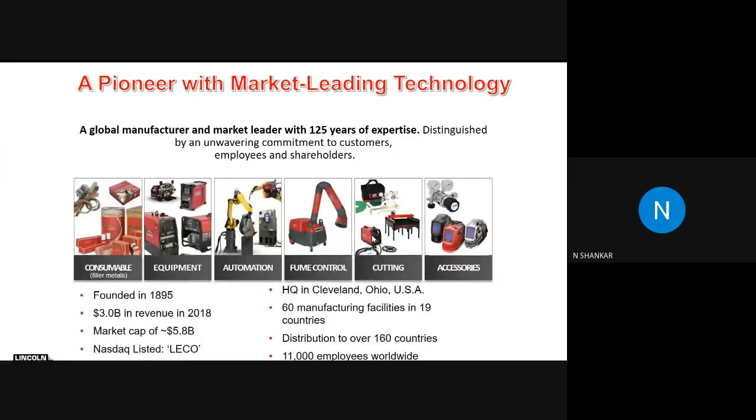We have 60 manufacturing facilities across 19 countries and distribution to over 160 countries and 11,000 employees worldwide. Lincoln India, where I come from, started off in 1997 as a regional office with no commercial transactions. Subsequently, in 2019, we built our own manufacturing facility. It's in the Mahindra World City premises, and we are presently the largest single wire manufacturing facility, meaning one particular factory's output - we are the largest MIG wire manufacturers across India.

And we are the market leaders in MIG wire. We also import and sell equipments from our different facilities all across the globe, and we have a fully equipped training center, and we do around 250 to 270 crores every year's turnover. If you look at Lincoln globally, we are one of only 3 companies in the world that can cater to all categories, like consumable equipment, gas products, automation - LECO, Colfax, and ITW.

And in local language, LECO is Lincoln Electric, Colfax is ESAB, and ITW is Miller. So we are the only 3 companies across the globe who offer a total welding solution and can provide you anything. And by a large margin, we are the market leaders.

We have a diversified business. Our business is not focused on a particular segment or particular solution. We lie across general fabrication, process, power, energy, heavy industries, construction equipment manufacturing, automotive, and transportation. So we have a solution for all ranges, and our business is diversified with about 42% of our revenue coming from equipment and 58% coming from consumables. Normally, if you see any welding company, they'll have a 30-70 combination, 70% coming from consumables and 30% from equipment, if it's a complete solution provider.

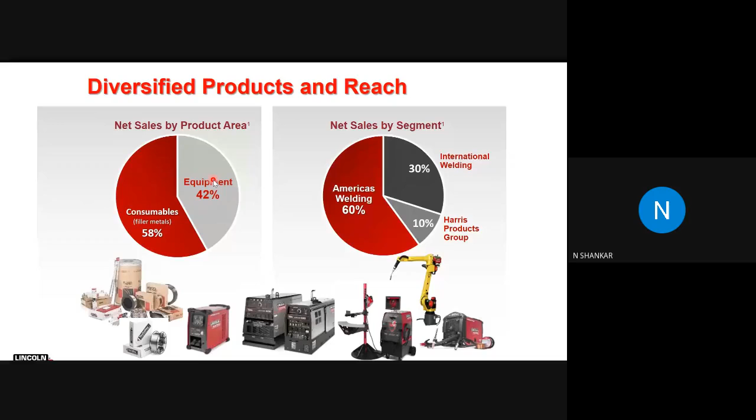We are the global leaders, and we are recognized as the welding experts, able to give you value and solution-driven products, and innovative products. There also we lead ahead. For example, we have kept changing with the industrial revolution.

When industrial revolution 2 came in, we were moving from transformer-based equipment and wire and stick-based filler materials, to where we moved on to inverter-based equipments and proprietary waveform technologies. When I say proprietary waveform technologies, I mean waveform controlled processes, or playing around with the current and voltage over time to give a weld. What is this waveform? It's nothing but playing around with the current and voltage.

When you're in a CV process, when you set the current and voltage, you allow the voltage to be constant, and the current dynamically keeps changing. But the current and voltage need not be at that level always, because heat is not required for welding all the time. So we play around with the current and voltage over time, and that's called waveform control technology.

We have developed a lot of solutions. We started off way back in the 90s with STT, which is a very famous process. Subsequently, we developed 100 plus. Each of these processes are developed for certain applications, so you have an end result, and based on that, you start working on a waveform.

That is why we have been innovating and providing automated solutions. And with the latest industrial revolution, Industry 4.0, all our machines are Industry 4.0 compatible. It's not just about collecting data and utilizing it, it's not an automated system, it's kind of an autonomous system which we are moving to with our LW 4.0, which is a lean weld solution.

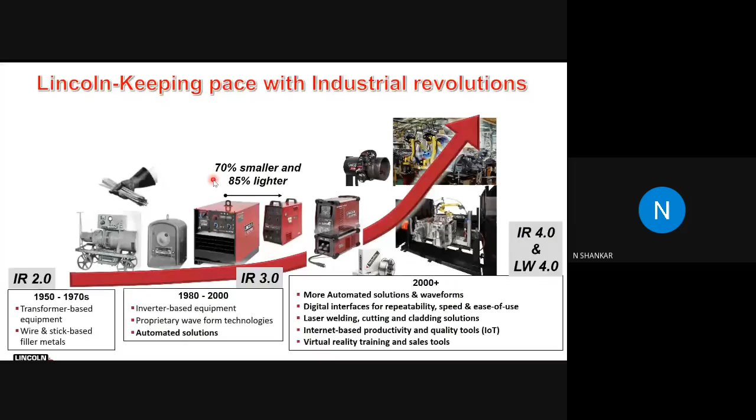We are there all across, as and when the technology kept developing, we were the forerunners, ahead of times. And if you look at Industry 4.0 and lean weld in India, our factory is a digital factory. We have got IoT installed, and all our wire drawing features in the factories are monitored through IoT. And we also support our customers with lean weld.

When I say lean weld, it's kind of synonymous with increasing your productivity and reducing the welding cost. There's no point in increasing the productivity of a customer if you're going to keep adding the manufacturing cost. So an ideal or lean solution comes in when you're able to increase productivity and also ensure that you reduce the total manufacturing cost. That is what we focus on with our IoT solutions in India.

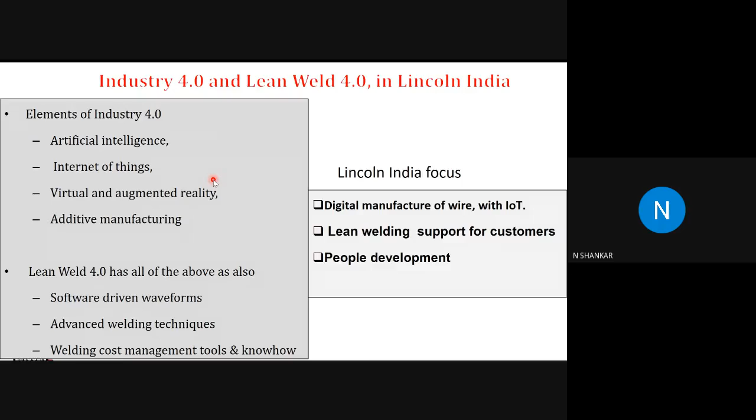So that's about Lincoln Electric, in general, a small synopsis.

Now when we come to today's topic, hybrid laser, I would like to start with laser welding. Laser processing is basically what you call heat generation. When we know what welding is, you need a heat source, and that heat source provides the heat required for melting the base metal into molten metal, and then welding it with or without filler. If the heat source is a laser source, it's laser welding basically.

So we have a laser source that focuses or brings the rays into a focus point to get the heat generated, and that's how you do laser welding. The intensity of the laser beam depends upon either the power of the laser source, normally mentioned in kilowatts, or on the focus spot size. You can see here the focal point; it depends on the beam diameter and the focal length also. Based on that, your energy is developed.

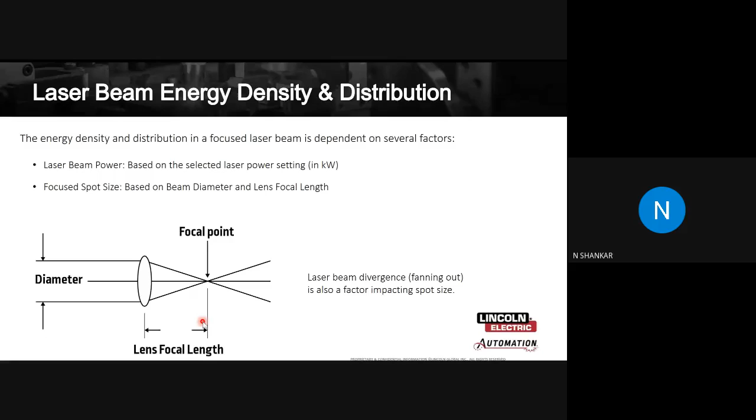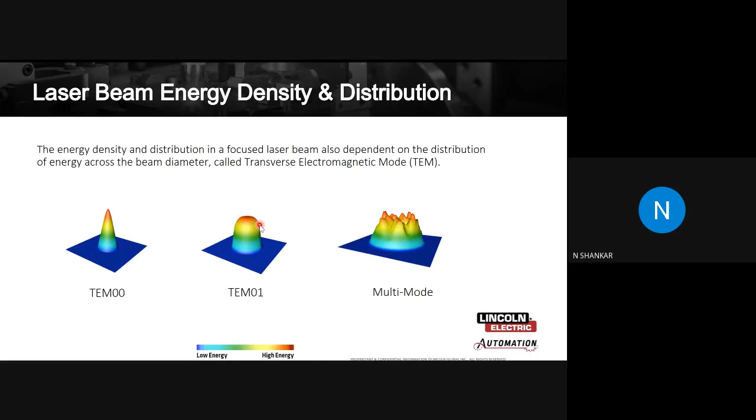So based on the energy density and distribution in a focused laser beam, it also depends on the distribution of energy across the beam diameter. This is called transverse electromagnetic mode, or TEM. You can have a pointed load like this, which is called TEM00, or you have a cap-like, hat-like profile, or you have multi-mode. These all depend on your focal point.

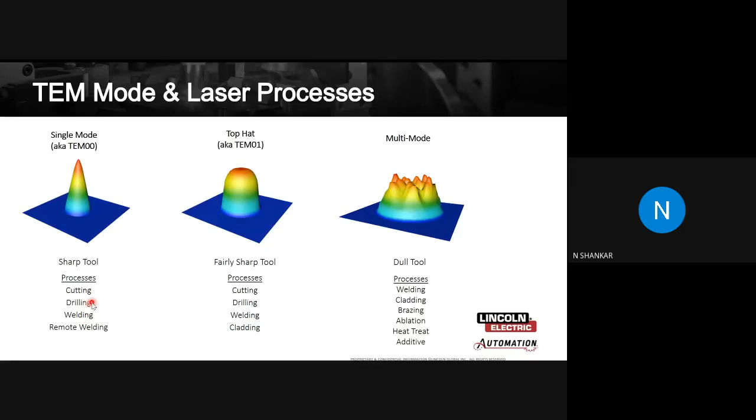To start with, the energy in the focused and unfocused laser beam is always the same. How you concentrate and bring that energy to a focus point decides whether it's going to be TEM00 or a multi-mode process. Each of them has its own advantage and finds specific applications. Like when you start with TEM00, you start with a sharp point, which is used for cutting, drilling, and welding applications. I'll just go through this slide.

Here it is, single mode laser. This has a concentrated energy point, best suited for cutting operations, drilling operations, and of course welding too. When I say remote welding, it's a non-contact type of welding basically.

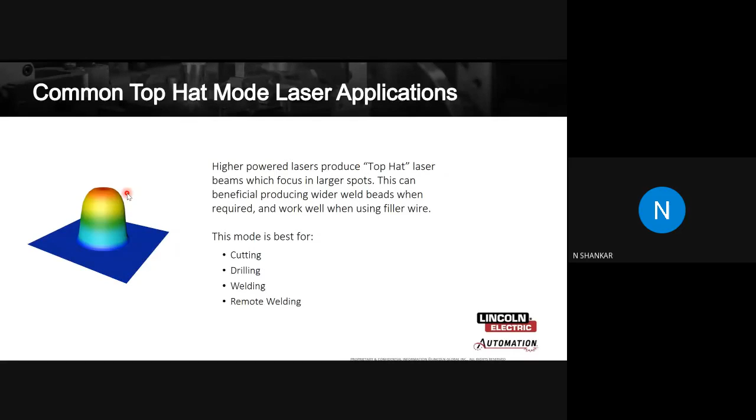And when you have a hat mode, it is also used in cutting, drilling, and welding, but here what matters is the end result. You get wider weld beads when you talk about welding. With the single mode you get a more focused weld bead, but with the hat mode you get a wider weld bead, and you have to use a filler wire when you use this kind of laser application.

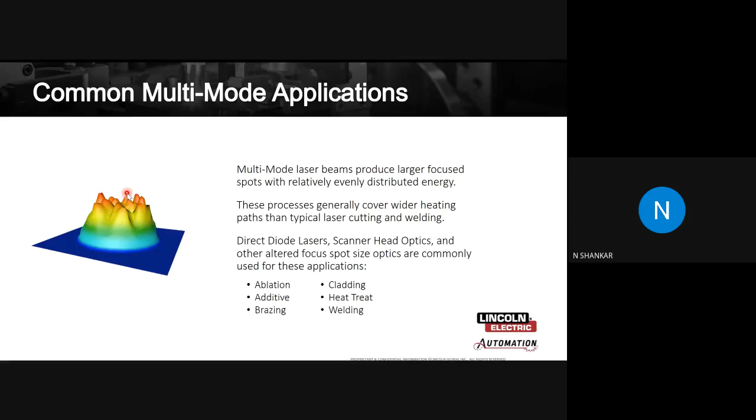When you go to multi-mode, pretty much all types of laser beams can get you multi-mode, and this can be used in cladding applications because the energy is dissipated, actually evenly distributed. So you don't want too much penetration in a cladding application. This could be ideal for cladding, heat treatment process, welding, brazing. Brazing is a low current process, and you can use it for brazing and also for additive manufacturing systems. These are some of the common multi-mode laser applications.

The brazing, for instance, you see over here. The cladding application, cladding is nothing but overlaying basically, and then the heat treatment actually. So multi-mode is applied across all these applications.

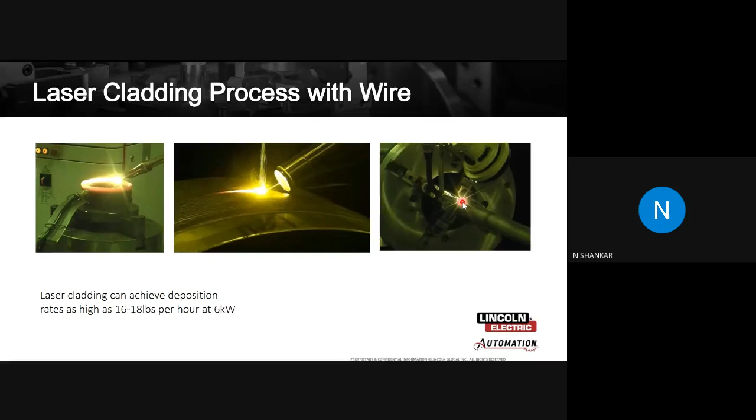Laser welding basically is when a laser beam is focused into a spot, it has got enough energy to melt the steel, and that creates laser welds. It's a non-contact type process. When I say non-contact, in MIG weld, GMAW or GTAW, the electrode and the job comes in contact. This is non-contact type welding, and it needs only access on one side of the weld.

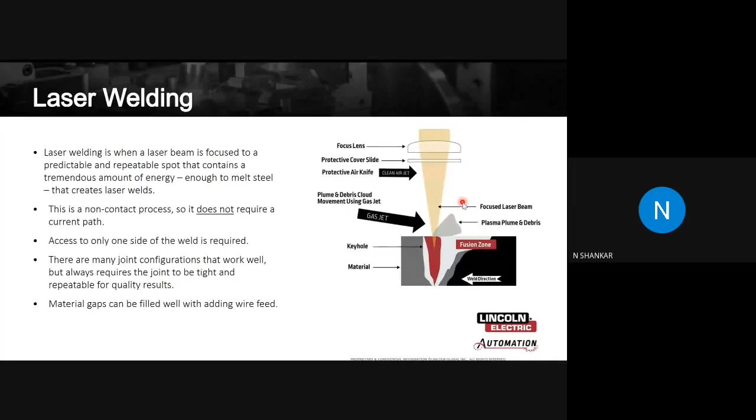There are many joint configurations that can be welded with this, and material gap can be filled by adding additional wires. The advantage of laser welding is basically you get lower cycle time, you get higher weld speed. You have very minimal or no spatters, so less cleanup time is required. It increases the level of performance and reliability, so you have higher productivity in general.

As far as the quality part is concerned, it gives you consistent and reliably high quality welds. It's got a shallow heat affected zone, it doesn't have a deep one, which means lower distortion. It's got precise control, and it's a closed loop with a feedback system, and it can be done in a stable welding environment. As I said earlier, it's a non-contact process. So this is the advantage of laser welding.

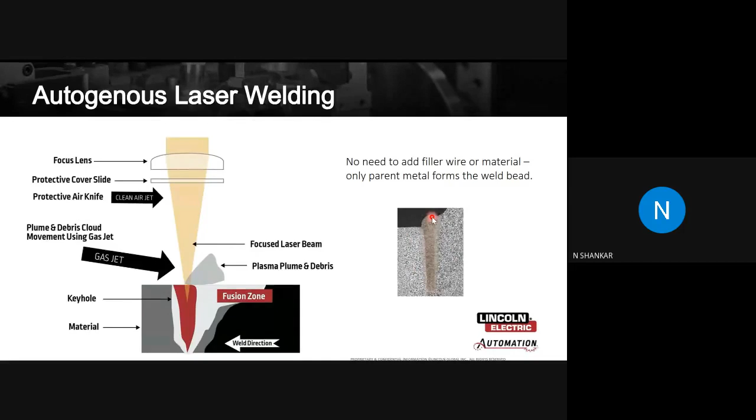Autogenous laser welding is where you don't use a filler material. You can see over here, the parent material is melted, and then the weld joint is formed. The autogenous laser welding advantage is that you can travel at very, very high speed.

When you talk about GMAW welding, you're going to talk about 1 meter per minute, 1.5 meters per minute. Or when you do a manual GMAW process, you're talking about 300 mm to 500 mm per minute welding. Here in automated laser welding, autogenous laser welding, you're talking about 10 meters per minute speed on a 1 mm thick material.

It's got lesser heat input, therefore lesser distortion, and it reduces the welding consumable cost because you're going to do autogenous welding without filler material. You'll have a deeper and more or less a narrow joint to have the weld done. So there's no consumable cost involved. It's a very clean process, no spatters, so after welding cleanup is not required.

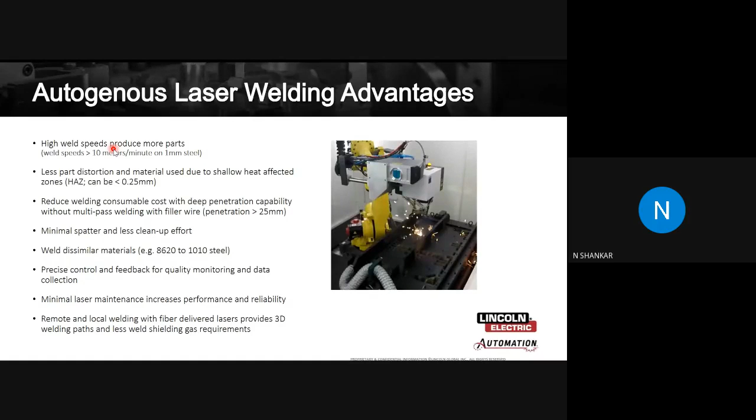It can weld dissimilar metals. And as I said earlier, it's a closed loop, so it's got precise control, and you have an excellent quality monitoring system where you ensure that you get the desirable quality. So this is the advantage of autogenous laser welding application, but there are disadvantages too.

There are some considerations too. For example, the initial equipment purchase cost can be higher than your conventional GMAW, GTAW, or SMAW welding machines. The input material has to be very high quality, it requires consistency, part to part. It cannot have variation in its joint design, it cannot have gaps. All these will lead to poor welding quality. So that's one disadvantage with autogenous welding.

And of course, the welding cost is also higher. We are working on a process to reduce the welding cost. That's one part that Lincoln Electric's laser division in the US is working on.

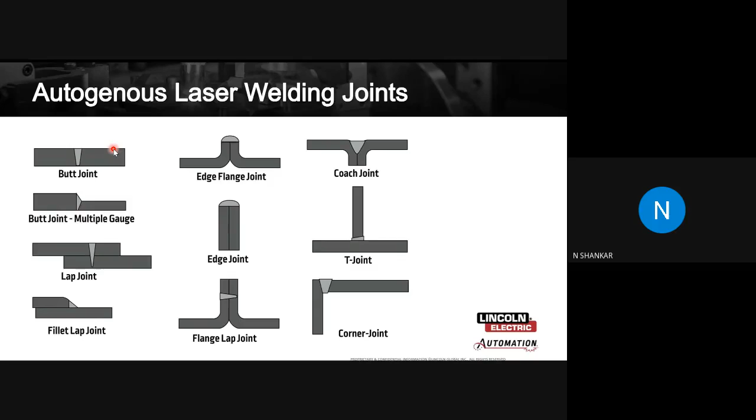This can weld on different weld joints. All the joint configurations you see over here, it can do the welding on all these joint configurations. And I clearly highlight that it should have lesser gap and it should have consistency in parts when you plan for laser welding application. Which means the input raw material cost may go up if you want to have consistency in quality, whereas in conventional GMAW welding, it sometimes forgives.

There are waveforms which sometimes can compensate gaps and those things, so the input raw material has to be clean and oil free. Actually this should be the case even with gas welding, GMAW welding, but here you need a much cleaner surface. At Lincoln, we are doing non-contact type welding applications.

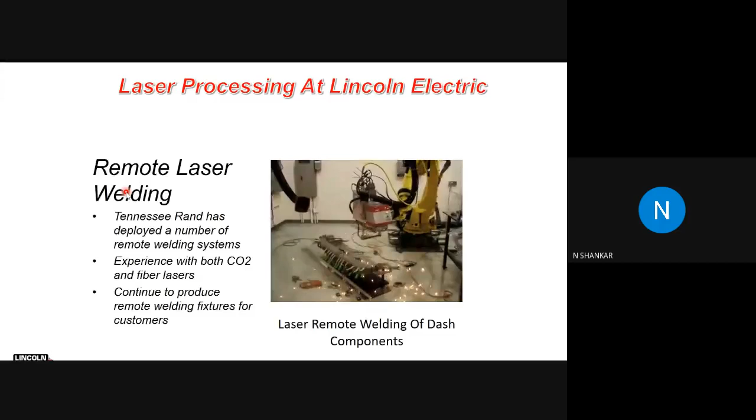You can see a video of a typical job being done with a laser process. This is a company called Tennessee Rand, a Lincoln company in the US. We have developed laser systems and we are also using laser for other applications, like you can see a high-speed drilling application on this Coca-Cola can.

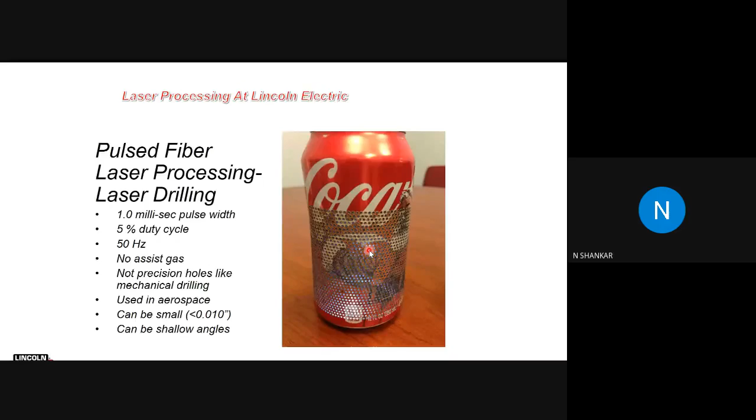Almost 4,000 holes were done in 80 seconds. You can have a look at the video. So this was done with the laser process, using a 300 watt laser power source.

We are also working on the hot wire laser process, which is basically for cladding applications. It will give you low dilution. In cladding, your most important requirements are low dilution, low heat input, and higher deposition rate. All this is possible with the laser hot wire process.

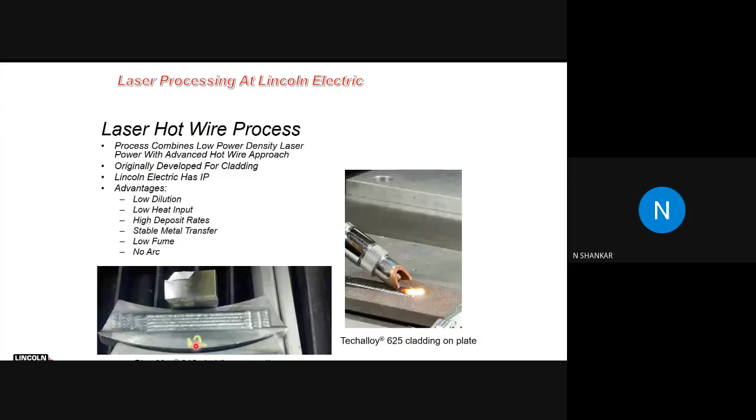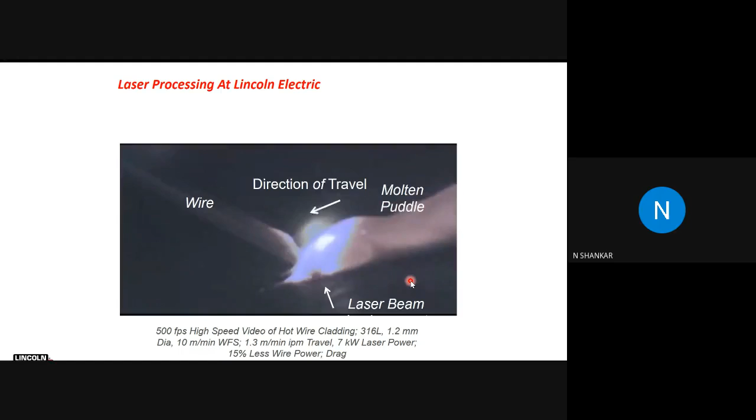So we have done a lot of cladding applications. You can see over here, the Techalloy 625 consumable is used for cladding applications, hot wire cladding applications. At Lincoln, we are doing a lot of development for laser applications. We haven't commercially entered in a big way yet, but all this development has been done in the last 5 years. There's a specific team working on laser welding applications and hybrid laser applications.

So this is going to be laser being used in additive manufacturing. So basically, this is laser welding for you, and I'll now go to hybrid laser welding.

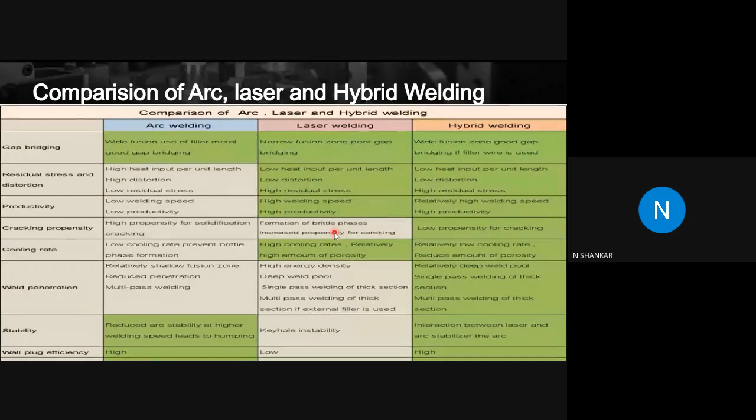Before going to that, I just picked this from the internet: why should you go for hybrid and not laser? If you can see, it is all green here, but there are some issues like weld penetration and cracking propensity, which are disadvantages with laser welding. So there are some cases where you would have to go with hybrid laser.

For example, you have to join dissimilar metals, and you want an alloying filler material that can strengthen the mechanical properties. You may need a consumable to definitely be used. In those cases, hybrid laser welding is proven to be a much better solution than laser welding.

In hybrid laser welding, the only difference is you have a keyhole and you feed a wire using a GMAW torch or a GMAW power source. You separately feed a wire and melt it in the molten metal. That's called hybrid laser welding.

It's faster than arc welding, but definitely slower than plain simple laser welding, or what you call autogenous laser welding. This is slower than autogenous laser welding, but finds more specific applications where you can implement hybrid laser welding. But it's much faster than the conventional GMAW welding process.

It gives you lesser part distortion than arc welding, because it gives a much shallower heat affected zone, unlike conventional arc welding machines. It will give you much better, deeper, wider penetration than the GMAW process. It gives minimum spatter compared to GMAW process, so you don't have cleaning time, which is again an issue with GMAW process.

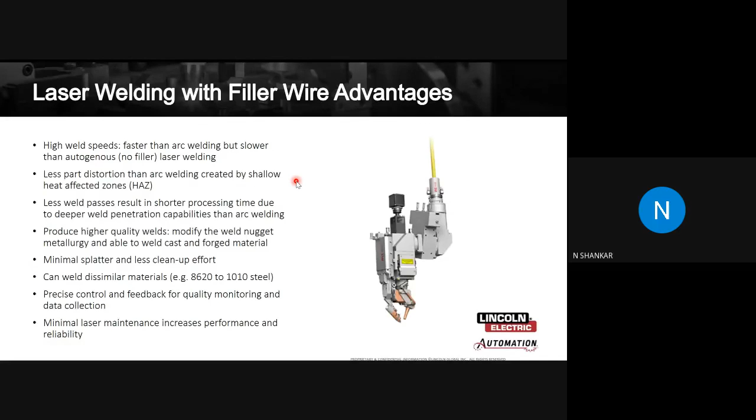It can easily weld dissimilar metals. It's more or less a control feedback closed system, so it has much better control on your process, and it has minimal maintenance with higher performance and reliability. Pretty much all kinds of weld joints can be done with hybrid laser welding.

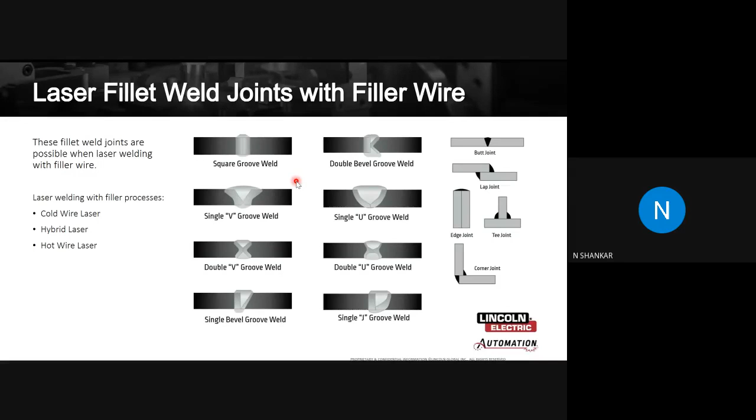You can do a cold wire laser or a hot wire laser with hybrid laser welding. When you say cold, you use a GMAW torch and feed a wire, conventionally called GMAW hybrid laser welding, where a combination of a laser arc with a GMAW wire is being fed.

Both of these together melt the base metal and then add the consumable to fill up the gap, and that's how you get a hybrid GMAW welding process. The heat affected zone is going to be definitely more than laser welding alone, but much less than GMAW alone.

It often finds extensive use in shipbuilding applications for heavy plate welding, where deeper penetration is required with huge weld joints. So this is the area where hybrid laser is applied. You can have hybrid laser with a hot wire process where the wire comes in preheated, giving much better deposition compared to a conventional hybrid GMAW process.

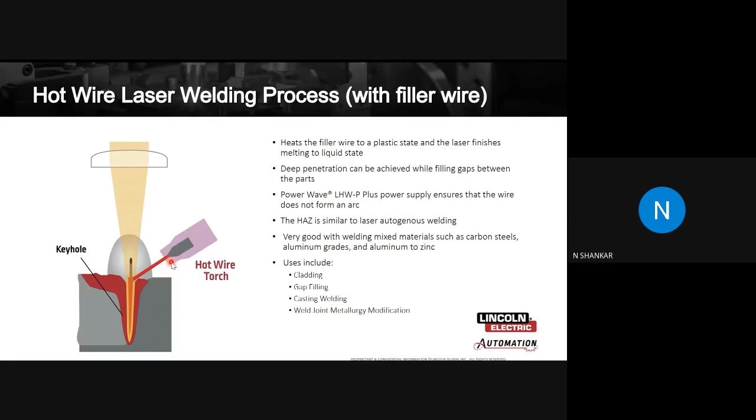Much deeper penetration can be achieved also with filling gaps with a higher deposition part of it. The heat affected zone is going to be lesser than arc welding, but not more than conventional laser welding - it's going to be more or less similar because of its hot wire capability. It's very good for welding materials such as carbon steel, aluminum, and aluminum to zinc welding is also possible. This finds extensive applications in places like cladding, where you need gap filling and welding, casting welding to be done. You'll find wide applications for this hot wire laser.

Similar to a hot wire laser, cold wire laser is where the wire doesn't come preheated, so there will be much lesser heat here. The filler just enters and gets melted with the energy available from the laser source. A deep penetration can be achieved while filling gaps with this process also. A servo-driven wire feeder is separately given to feed the wire into this. The HAZ is similar to laser autogenous welding because it's absolutely a cold wire being fed and only laser energy is coming in, so it will have almost the same heat in HAZ similar to an autogenous welding application.

The only advantage with cold wire over hot wire is that the wire welding power supply is not required here. In a hot wire, you need a welding power source to heat or preheat the wire, which is not required when you do cold wire filling. This also finds use in cladding applications wherever gap filling is required and welding of casted parts is required. This again is a good process.

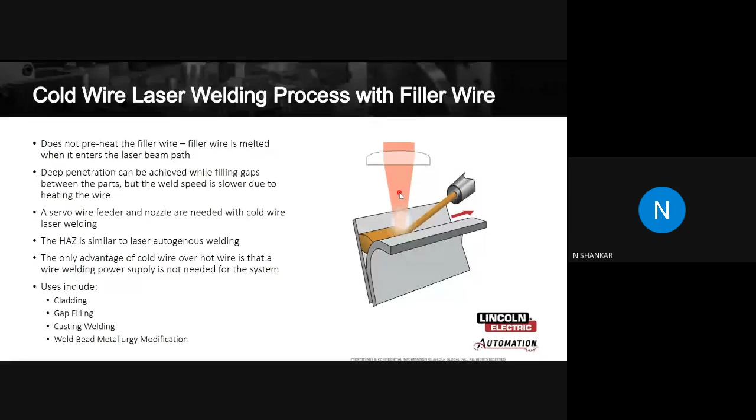When you compare the laser welding process, hybrid laser welding is preferred for stronger and deeper penetration welds on heavier material compared to the autogenous laser welding process. Hot wire laser welding process has lesser HAZ compared to arc welding and has got lesser part distortion, and it can also allow you to weld a combination of thick to thin materials.

You also have laser brazing. You use a conventional laser wire and then feed the brazing wire to the servo drive wire feeder - that's called brazing. If it's a copper wire based wire, that's called brazing. That's what is happening here. This will produce high quality joints with minimum HAZ and absolutely no distortion on the workpieces. No cleanup is required prior to painting - that is a big headache.

You'll find hybrid laser being used in critical applications. One classic example all across the world where hybrid laser is employed is during the welding of the roof of automotive cars - it could be Ford, Volkswagen in India, or any big players across the world. They employ hybrid laser for the roof welding applications.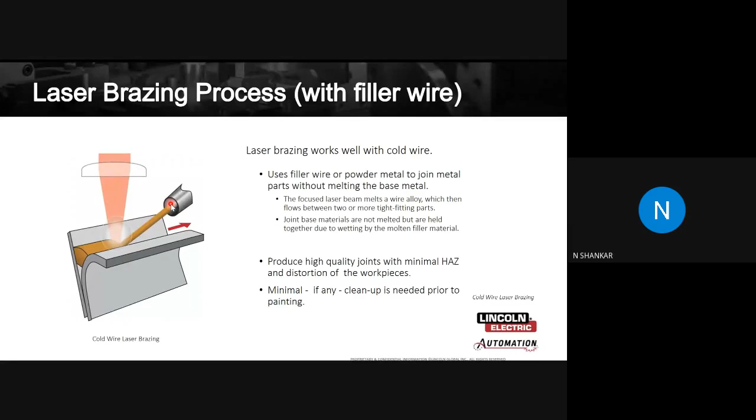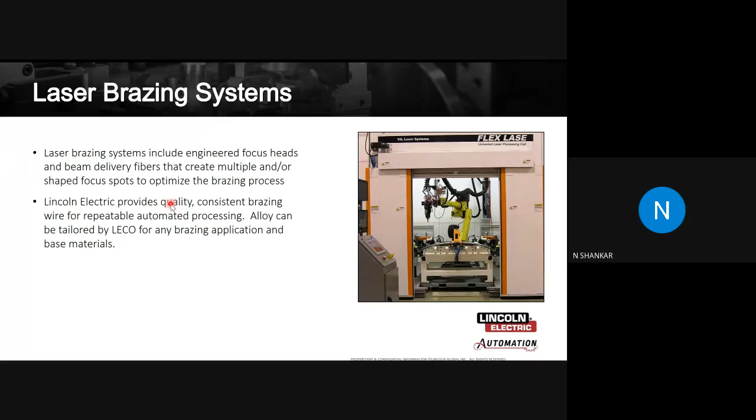Laser brazing system is also used extensively in the roof welding applications because after welding you can't have any cleaning process - when you paint or powder coat, there will be marks visible, which is not acceptable for high quality and high standards of workmanship. That is what hybrid laser and hybrid MIG brazing will help you achieve. So that is one advantage of hybrid laser and hybrid brazing application.

It's used on automotive visible class A surfaces - parts that are visible when you see externally: the tail gates, the roofs, the C pillars. All of these are more or less 100% built with the laser brazing process all across the globe. It's got very low heat input, absolutely no distortion, and ensures strong weld joints with lower heat input. They do very high-speed welding. The productivity, which is a concern for the automotive industry, is handled here, and it's a very flexible process. And of course, it's a non-plasma process - that is one more advantage of laser brazing.

Typically, where do you find laser welding and hybrid laser welding? It could be autogenous welding, hybrid welding, either with cold wire or hot wire. They find extensive applications in industries like aerospace, automotive, large vehicle and heavy vehicle manufacturers, appliances manufacturers, and nuclear industries, which find a large application for hydrogen fuel cells and battery applications. For the HVAC industry, you'll find extensive use of laser welding in all these areas.

Typically in automotive industries, you'll find it more in the body in white, power transmission parts, and commercial ovens. These are areas where Lincoln has worked on. The commercial ovens, industrial fans, wind bands, seat frames, nuclear reactors, hydrogen fuel cells, cathode and anode assemblies - all these are places where Lincoln has worked in providing laser-based solutions.

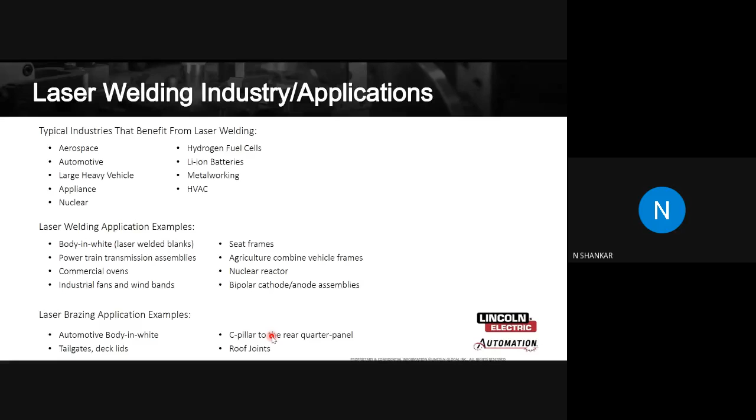Here's an example of a transmission assembly where a laser solution was provided. It was a 2 kilowatt to 6 kilowatt laser power source that was used, developed by Lincoln's automation team. It's been used for powertrain applications where we have two station systems where the operator keeps loading each station. We have laser hybrid welding being done here.

Automotive seat application - like I was talking about the roof, one big challenge in automotive industries is the seat, because these are tiny parts and you need to be extra cautious, because the user is going to sit on that. There's load constraint also to be taken care of, and these are very small, tiny parts with a lot of complex structures to be welded. So laser welding finds wide extensive usage in these seat assembly weldings.

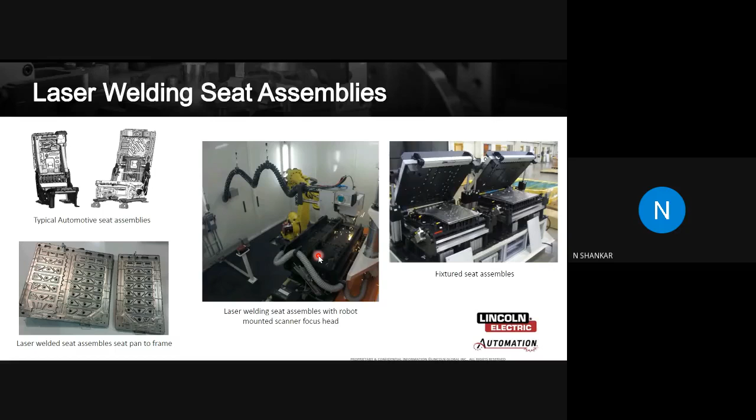Lincoln has supplied a lot of machines for seat assembly welding, not only in India but across the globe. This also finds application in seat assembly welding.

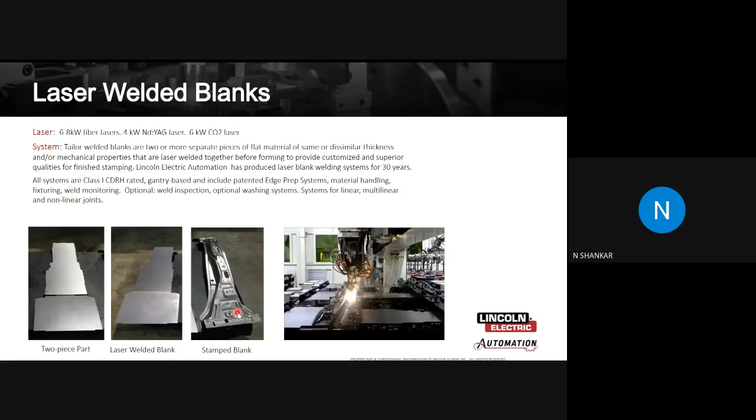One more example is welding a laser blank. You can see these two pieces - they are laser welded, and then they are taken for processing, the blanking operation. So it finds a lot of application.

Nuclear assemblies is another application where we supplied an 8 kilowatt laser power source. It was a complete system with seam tracking, welding monitoring, and taking out data to ensure the process. We are having process controls, so it's a complete closed loop system which we have worked on for nuclear assemblies.

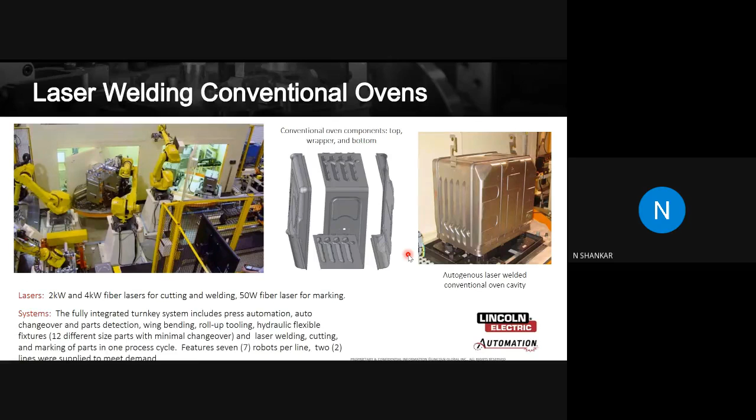Here is a conventional oven I was talking about. There are 3 parts to be welded - these are blanked, punched, and then welded. These find domestic use, so it's got to be pretty good, neat, clean build, which was achieved with laser applications. Here we used a 2 to 4 kilowatt laser power source for doing this welding application with 7 robots doing this.

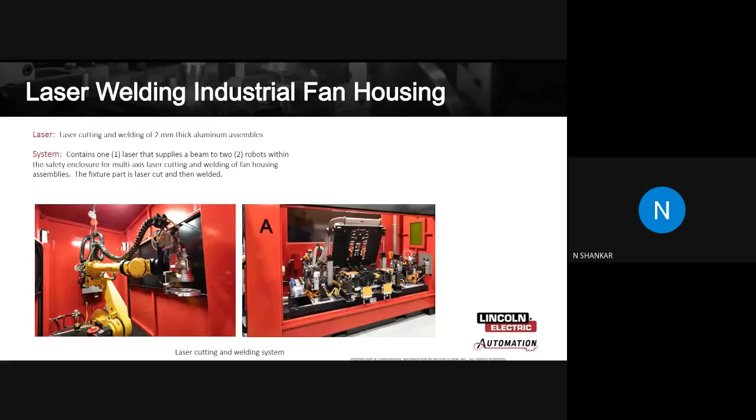Industrial fan housing is another example where a laser welding solution was used. Again, it was a robotic system where the fixturing was developed, and one laser source was used for both cutting and welding applications. We had 2 robots, one carrying a cutting torch and one a welding torch. So this is a typical application where hybrid laser welding has been used.

Fuel cell is another example where this laser welding application was used, and there are a lot of areas where hybrid laser welding finds its own usages.

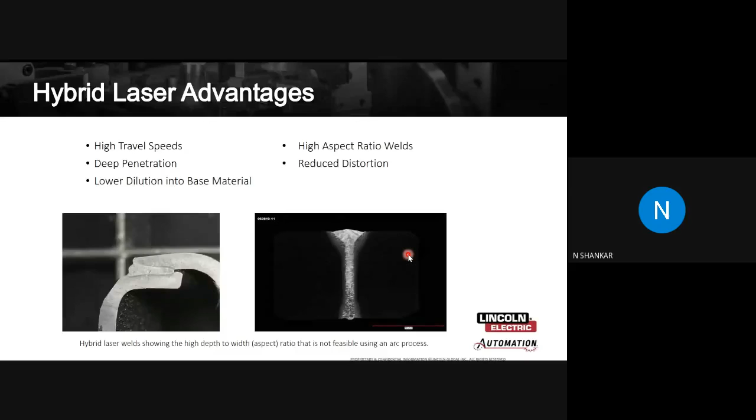Here's another example. These hybrid lasers are advantageous for industries basically because they give very high travel speed, and they give you very deep penetration based on your requirement, and lower dilution into base material, which means you have a shallow heat affected zone. You get the required strength, but you don't overdo the welding, because there's a limit to which you can control a GMAW process. This process is highly controllable, and therefore you have a much better, reduced distortion rate.

It has not yet been commercially used in a big way in industries, but it's slowly making inroads, and it's going to replace a few processes, not everything - in India we are not there yet. We still have more than 60% of welding being done with stick welding or SMAW welding, which is the slowest, most inefficient process, but certain applications demand these weldings.

So there are still areas where we stick with stick SMAW welding. Our primary focus should be to move to faster and efficient processes like GMAW, GTAW, SAW.

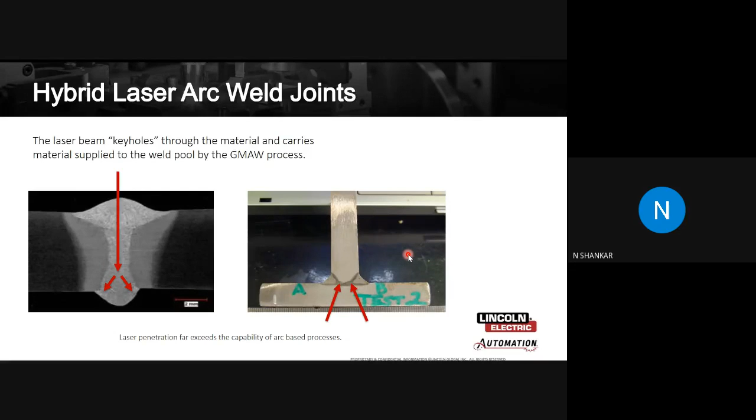Laser is a long way to go, but there are a lot of industries in India which have already started. Like I was telling you, you'll find this hybrid laser in all automotive industries for roof welding. You go to Hyundai, Ford, Volkswagen, anywhere, you'll find them being used for the C-pillar and also for roof welding applications. The keyhole part of it allows you to weld with much lesser consumables.

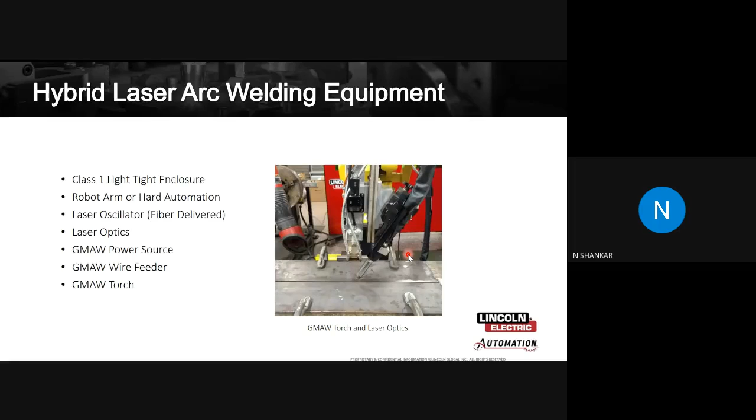So your consumable cost comes down when you compare the process to a GMAW process. It's completely automatable. You can have oscillation done, hot wire, cold wire process. You can integrate it with a robot, with an SPM. So it's a completely automatable process, or in other words, it's an automatic process only. It's not a manual process actually.

It's been used for sheet to beam welding also. Lincoln has used it for beam welding, what you call as PEBs, or for heavy beams, with very high speed of 1.5 meters per minute for each side. So it's a very high speed productive solution, hybrid laser welding.

It can weld I-beams as I was telling you. Butt welds are possible, and you can travel from 1.5 to 3 meters per minute speed with full penetration from one side. There's something called OSW, one side weld, with 100% penetration possible with hybrid laser welding. So that is hybrid laser welding for you.

I just wanted to mention this because we've been talking a lot about the GMAW process. There are a lot of advanced GMAW processes which we've been discussing. Even Morgan sir was talking about the pulsed process, which has got a lot of advantages, like specific applications.

If you want to weld a coated sheet, for example, a zinc coated sheet, it's a big challenge to weld. When welding a zinc coated sheet, you need extremely good techniques and extremely good control over the welding. Otherwise it is not possible to eliminate pinholes in a zinc coated plate or coated sheet. So there's a minimum allowable limit set by the WPS, or your quality team will set an acceptable limit of pinholes in a zinc coated welded sheet because of this challenge. What's happening is zinc vapor tries to escape after the top material solidifies, leaving a gap through which the gas vapor escapes, ending up in blowholes or pinholes. Those challenges can be addressed by having a specific solution with a waveform and technique to do that.

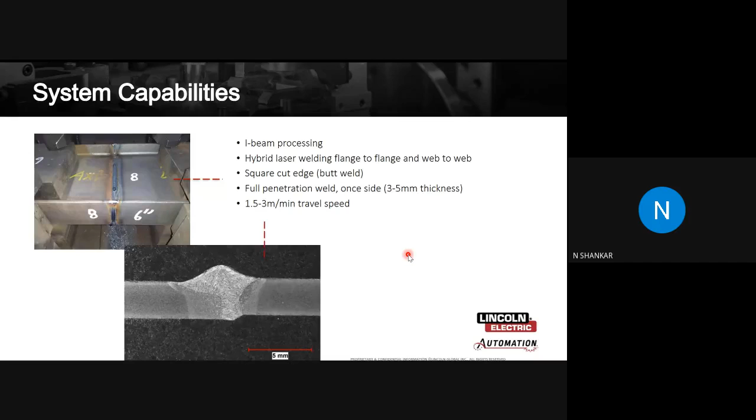And we're talking about the automotive roof, one classic example where hybrid laser can be a solution. So this is finding extensive use in the industry. It's slowly and steadily replacing certain GMAW processes, certain non-productive processes, with high-speed productive solutions. So that's hybrid laser for you.

If you have any questions on hybrid laser, I can take them on. But before that, I'd like to finish. Since I started talking about hybrid laser, hybrid is nothing but combining two processes, as I said earlier.

So I would like to talk about strip cladding also, which is also an overlay welding process, where we have gone hybrid. I'll just throw some ideas onto this so that it'll be of interest to you.

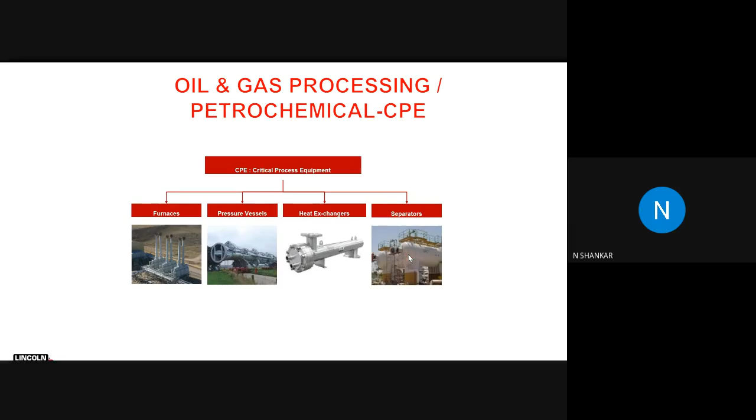Strip cladding finds wide and extensive use in applications involving critical process equipment in the oil and gas industries, petrochemical industries - furnaces, pressure vessels, heat exchangers, separators. All of them are special; they need to be manufactured with special grade materials.

But these are huge in size and subjected to severe operating conditions, which require a high level of reliability. For example, you need a base material with good impact toughness and creep resistance, like manganese or chromoly vanadium steel. Also, on the inside of this process equipment, you need wear resistance, corrosion resistance, and high temperature protection, which is a slightly different characteristic for different materials like austenitic stainless steel, nickel alloys, monel, duplex stainless steel, and so on.

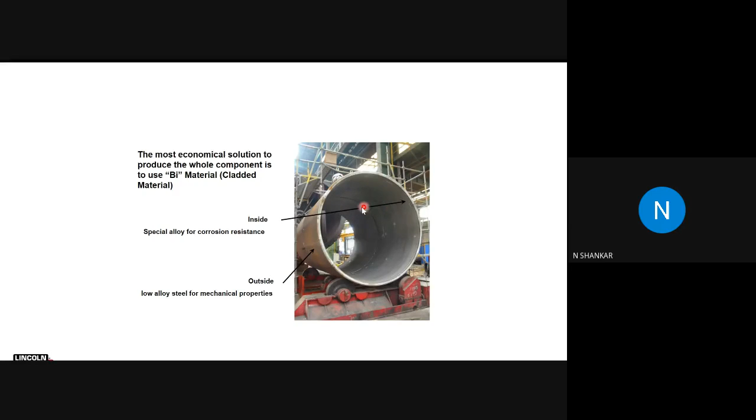So manufacturing all these things using one complete material may be very expensive. What people have started doing is having a base material of one composition, and on the inside, where corrosion resistance is required, they overlay or pack it with a different material. That's called cladding - it's a bi-material cladding. So from the outside you'll have low alloy steel, and from inside you'll have a special corrosion resistant alloy. Mechanical properties are taken care of by the outside one.

So how do I clad it? The cladding plate can be done either by roll bonding or by explosion bonding, and they are stuck together, then fixed onto the inner wall of the pressure vessels.

Another way of doing it is by welding overlay. That's what we are going to see now - the welding overlay cladding process.

Initially, they started off with wire cladding, because in welding we use MIG wires and submerged arc wires. But since you want to lay over such a big area, it's a time-consuming process. So people moved on to strip cladding, where instead of a wire, a strip is used. It could be a 30 mm, 60 mm, 90 mm, or 120 mm strip with 0.5 to 0.7 mm thickness, used to overlay the inner walls of pressure vessels. That's called strip cladding.

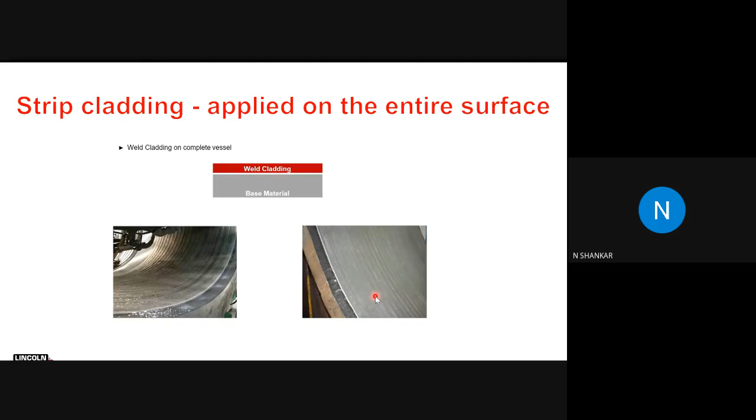You can see some photographs of strip cladding - there's a ball valve, and a lot of pressure vessel additions you see here. All of these are cladded.

Initially, strip cladding was done with the submerged arc process, a wire process, then they moved to submerged arc strip cladding process. Now we've moved to electroslag strip cladding process, and the last one is the hybrid electroslag strip cladding process. This was way back in the 60s it was developed. In the 80s, they moved to electroslag, or ESSC, which is higher speed than submerged arc strip cladding. Then recently, in 2016, this hybrid strip cladding came.

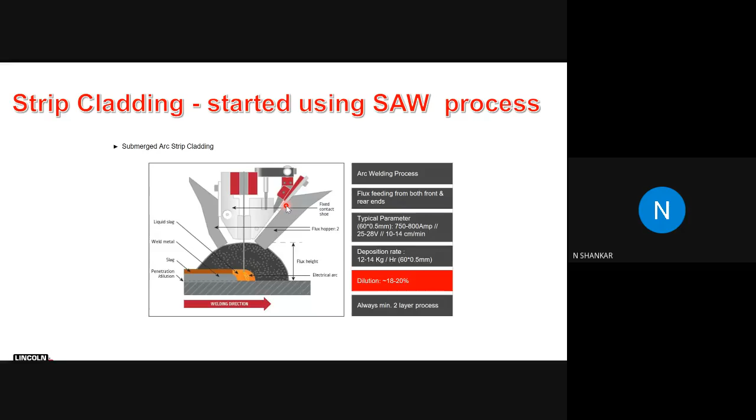Now we look at strip cladding using a submerged arc process. You need to have fluxes on both sides, feeding from the front side and the rear side also. Typical parameters are 750 to 800 amps, 25 to 28 volts, and travel speed can be around 100 mm to 140 mm per minute. The deposition rate is usually about 12 to 14 kilograms per hour. Dilution, which is very important, is 18 to 20%, and it's always a minimum 2 layer process.

Dilution is defined by the penetration you're able to achieve divided by the total weld height. In cladding, what you want is for the material to be bonded, not penetrating too much, because the inside layer has to take care of corrosion resistance or thermal resistance on the inside of the wall. So you don't need penetration - less penetration or less dilution is better in cladding, which is why you want much lesser dilution for cladding applications.

With the submerged arc machine, you can get around 20% dilution. When you do cladding with wire, you get 25 to 35% dilution. With strip, you get 18 to 20% dilution. And when you go to electroslag welding, you're able to get 7 to 12% dilution. So it's better to go from submerged arc strip cladding, or SASC, to electroslag strip cladding, or ESSC. The electroslag strip cladding revolutionized the process because it was able to achieve much lesser dilution of 7 to 12%.

It has moved from arc process to arcless process. It works on Joule's heating effect basically.

So the flux feeding is also required from only one side. You would have seen in the previous slide, flux feeding is required on both sides, and arcing is done. Here it's not arcing, it's Joule heating effect that's come into picture. And some flux is required only on one side, and you can travel at very high current of 1000 plus amps, even up to 1600 amps, with the same 20 to 22, 24 to 26 volt, and you can travel at very high speed of 16 to 35 centimeters per minute. You're looking at a deposition rate also to be more than doubled, 22 to 28 kilograms per hour deposition, which means more overlay per hour.

Dilution rate is 7 to 12%, which means you get much better depositions basically. You can do a single or a two-layer process with this electroslag strip cladding, and you get a clean chemistry when you do with an ESSC process rather than with the SASC process actually. So that is the advantage of electroslag strip cladding.

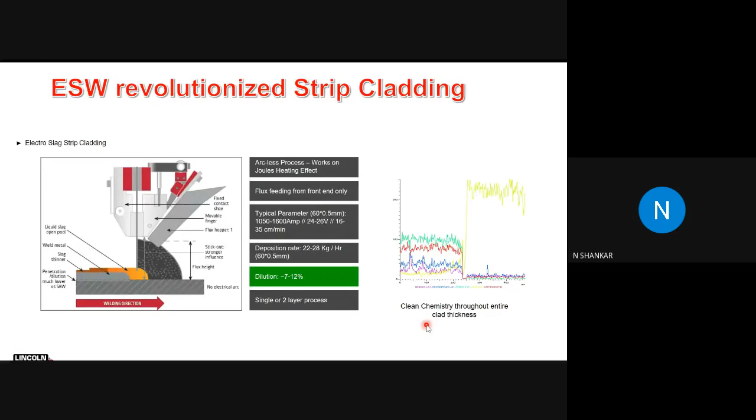Now I'll come to the hybrid part of it. Why do I call it a hybrid electroslag strip cladding welding application? Because I have the same flux being fed on one side, I have got the same Joule heating effect, but I introduce an additional metal core wire, maybe one wire, maybe two wires, into the heat zone, into the hot molten material, and the metal core wire takes heat from this, melts and deposits more. So you get a higher deposition for the same current range, and you're going to deposit 32 to 42 kilograms per hour based on your parameter setting.

And you can use 60 mm strip. In addition to that, you can use two 1.6 mm wire metal core wires. Metal core wires will give you much better, higher deposition than solid wire, you know that. So this is directly giving you this hybrid cladding application by introducing two metal core wires. Additionally, it increases your deposition rate by close to 25 to 30% more than that basically, and it has got a good low dilution level, and it still is able to give you clean chemistry.

Also, this metal core wire will give you an additional benefit of adding any additional material composition you want to be added to provide higher corrosion resistance, higher strength, whatever is required. So this can be done by adding a metal core wire to the strip cladding process. So that is what is called hybrid strip cladding applications.

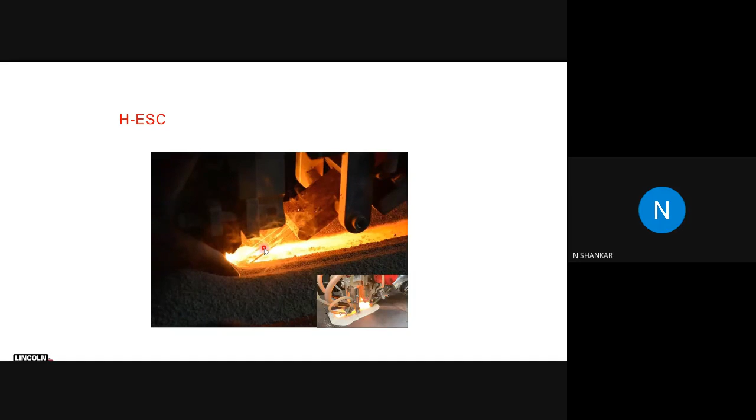You can see a photograph here. This is a strip that's being cladded, and there are 3 wires fed here. So you can feed 1, 2, or 3 wires and make it much more effective. So that is hybrid electroslag strip cladding application.

Now, when we come to the metal core part of it, hybrid metal core part of it, what are the advantages by adding? It can compensate loss in alloying elements by adding alloy elements to the metal core wires. So this will take care of the chemistry of your end weld thing, and will give you a higher current. Metal core is decided because it gives you a higher current density than solid wire, meaning it requires less energy to melt, and we are not preheating it. We are picking up the heat from the strip clad itself to deposit. It absorbs weld pool energy, helps to control the heat input, dilution, and weld puddle.

The metal core is fed into the hottest part of the strip, and it does homogeneous weld deposit. Hot metal core addition to the molten metal increases deposition rate substantially. It also introduces flexibility in achieving stringent weld chemistry in thinnest possible height by adding additive material, whatever alloying element you want, you can use in the metal core wire.

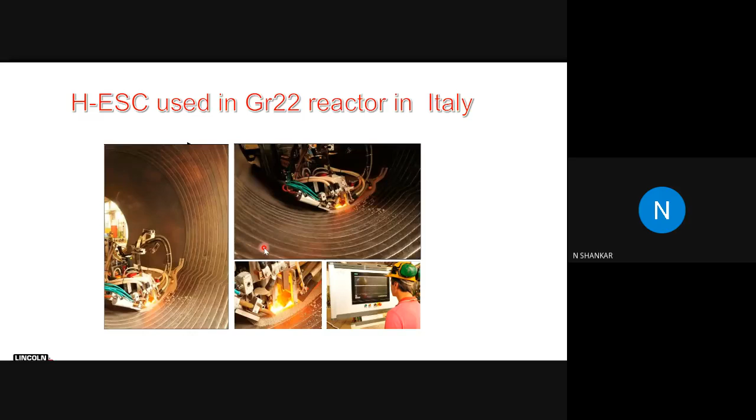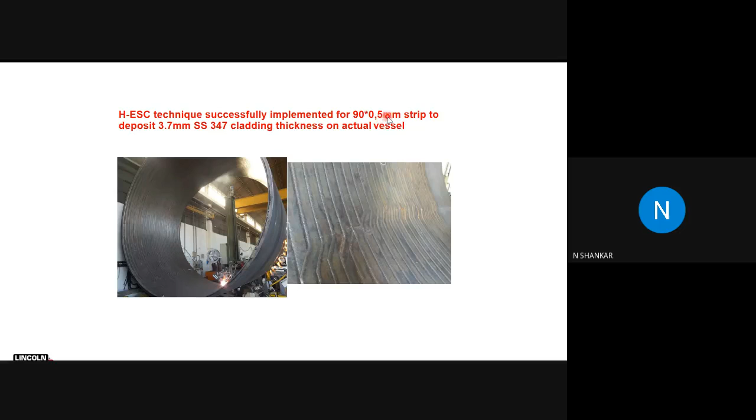So that is one successful application that Lincoln has used, the hybrid electroslag strip cladding application. This is a GR22 reactor, which is cladded with the hybrid process in Italy. Here is a 347 cladding material where cladding was done with the hybrid electroslag cladding applications actually. Here we used a 90 mm strip, 0.5 mm strip to deposit 3.7 mm overlay height. Actually, that's deposited.

We also have developed this for smaller diameter cylinders to do the inner walls of the smaller diameter cylinders. The ESSC with hybrid technology has been used in those applications too.

So in summary, the ESW, the electroslag welding, is the most used strip cladding process for critical pressure equipments, or the CPEs, fabrication.

ESW can offer you a single layer high speed solution for many commonly used alloys. By adding the hot metal core wire to the ESW weld pool, it offers various benefits including lower dilution, higher deposition rate, and higher speed.

The hybrid ESC achieves much stringent cladding chemistry, which makes it much better to use these kind of solutions. It gives you flexibility in cladding. It allows you to easily achieve your desired cladding chemistry and cladding thickness without changing the strip chemistry and cladding flux.

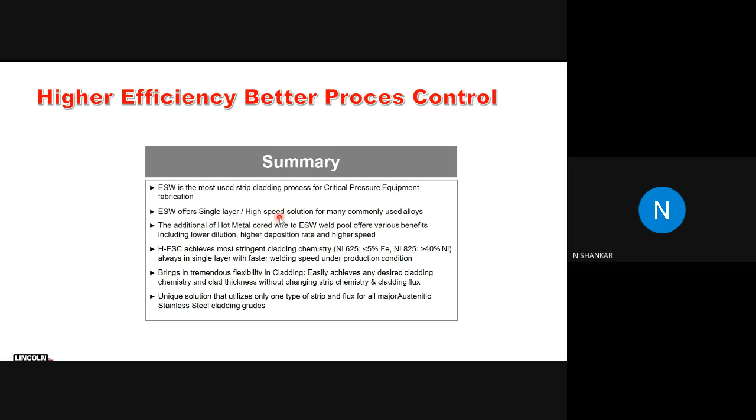This one thing has given Lincoln an advantage of allowing you to use one single flux for any applications. The flux is common for any of the ESW applications you want to use. You don't have to maintain different flux for different material composition. No, common flux. That is done with this solution actually. That's the last point I was trying to explain.

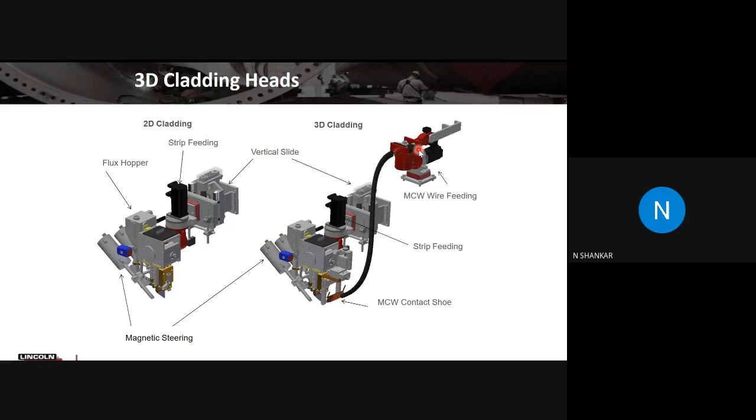In addition to the 2D cladding, we have a separate metal core feeder, and the rest of the thing is taken care by the power source and the electronic control part of the machine. So this is hybrid strip cladding for you.

Then I finished my second topic. I was addressing hybrid laser. I was talking about hybrid strip cladding.

Now this is called hybrid thin wire welding, but basically this is a conventional GMAW process special. I'll tell you why. When we are doing welding, our main focus, as I told you when I started, is we focus on lean management, which is depositing more by reducing the deposition cost or the manufacturing cost.

So when you look at means and ways of increasing your productivity, people normally talk about using higher diameter wires. For example, if I'm welding with a 0.8 mm wire, if I move to a 1 mm wire, and I move to a 1.2 mm wire, I can move to a 1.6 mm wire. That is where GMAW ends.

But some customers, some industries, have started using 2 mm wire for the GMAW process. They assume that by increasing the wire diameter, you will deposit more. The other way is to have two wires together welding in one single arc. This is multi-wire systems. So these are ways and means of increasing deposition.

But Lincoln normally looks at what is the most cost-effective way of depositing higher. Now I want to address the general perception that people have, which is, it is true that when you're depositing using a 1 mm wire versus a 1.2 mm wire, your 1.2 mm wire will deposit more. It is not true always.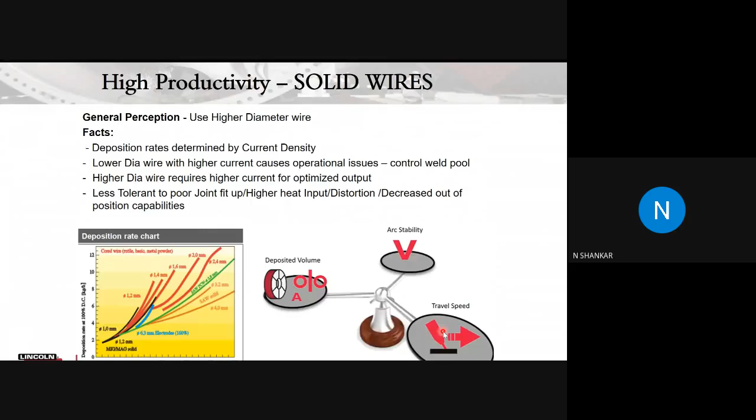So increasing the current alone will not help, increasing the wire diameter will not help. We have done a study in our Lincoln Weld lab to see what are the effects of increasing current, voltage, travel speed and wire feed speed on a process and see how stable it is.

We found out that until a certain current range, it's better to use a 1 mm or 1.2 mm wire. When you cross a transition level, it's better to move to a 1.4 mm wire. The transition level where I could use a 1.6 mm wire was ruled out because 1.6 mm was not able to give the best result when doing manual welding.

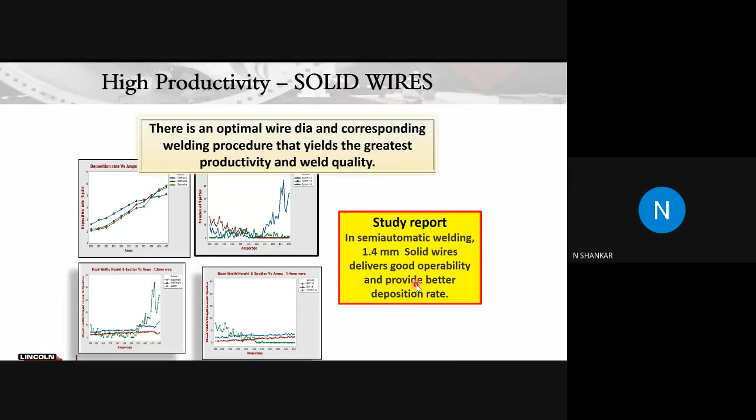In our robotic systems, yes, we have to again do the trials and decide. So we decided that for manual welding, and also to some extent robotic welding, it's always better to use a 1.4 mm wire to give you the optimum deposition. I'm not saying maximum deposition, I'm saying optimum deposition - meaning good quality weld, required mechanical properties, penetration, quality parameters, everything meeting, and you have a higher speed. So optimization comes at 1.4 mm for the manual process.

That is what we studied. This made us realize that increasing the wire size is not the only solution. The other way of looking at increasing deposition is having two wires in the same arc. You have heard about tandem MIG.

Tandem MIG is a process that has been extensively used now in a lot of industries. All the earth moving manufacturers like JCB and Caterpillar have started using tandem MIGs. Their tier 1 suppliers have also moved to tandem MIGs.

It means two power sources welding at the same time in a single puddle - two power sources, two wire feeders, two contact tips, two liners, two arcs, but one single weld puddle. This will help you deposit more than what you can do with a single wire system and increase your productivity.

This will give you exceptional deposition rate, as high as 15 kilograms per hour if you want. It will also give you reduced heat input because it allows you to travel at very high speed, and also gives you superior weld quality.

At Lincoln, we have developed two types of hot wire tandem process: synchronized tandem and hot wire tandem. In synchronized tandem, both wires arc and melt one after another in tandem to give a good stable arc. In hot wire tandem, only one wire will arc - the other will only be a hot wire feeder kind of solution, but you still use two power sources. Both of these find extensive application in their own region.

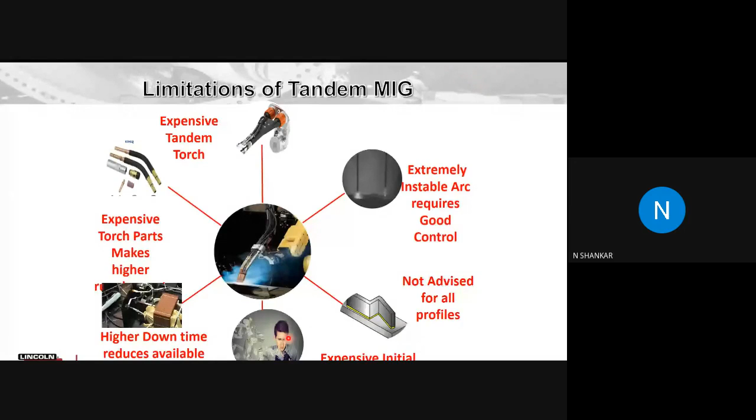Also it is going to be very expensive because you're using two power sources, two wire feeders, all with a special torch and special controller. So it's not going to be twice that of a single wire system - it is much more than that. That is why there are a lot of limitations with tandem MIG.

So Lincoln was thinking of developing a hybrid process. What I mean by hybrid process is I want a machine that can give me the deposition rate of tandem MIG, but not as expensive as tandem MIG, and not with so much complexity. That is how Lincoln developed something called the Hyperfill process, removing all the complexities involved in tandem MIG welding.

So it is a hybrid process between the single wire and tandem arc process, and is the first ever twin wire process that could be used for both robotic and manual welding applications.

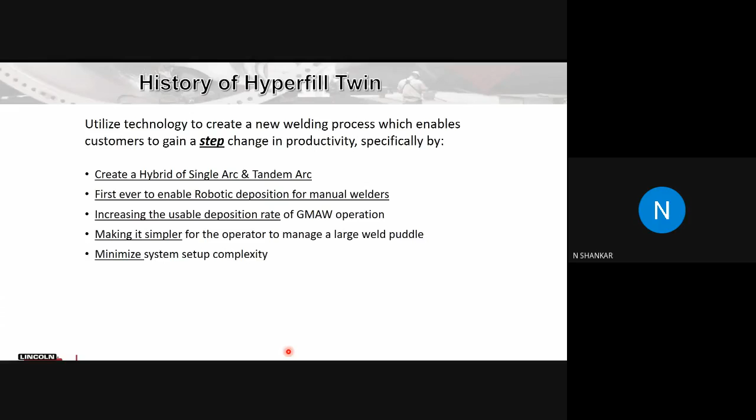It increases the deposition rate of the GMAW process more than twice, makes it simple for the operator to manage the weld puddle, which has been tested and proven, and also minimizes the setup complexity that comes with the tandem setup. So where you have difficulty in terms of process or commercial viability, Hyperfill is a solution.

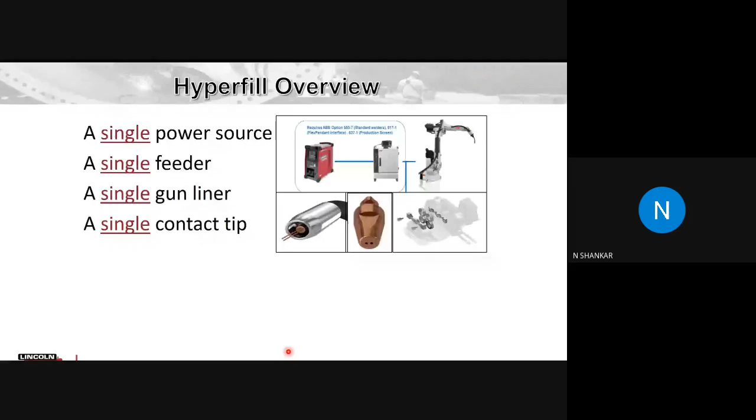How is Hyperfill a hybrid process and different from tandem? Because it's got only one single power source, single wire feeder, single torch, single liner, and single contact tip. Not just that, it's got only a single arc, but it gives you 2-wire deposition, which means 100% increase in efficiency of deposition. That's called the Hyperfill process.

I'm just showing this small video. You can see here there are 2 wires actually, but there's only 1 arc. Even though there are 2 wires, there's only 1 arc. And you can see it's a much wider arc in comparison to a conventional single wire MIG process.

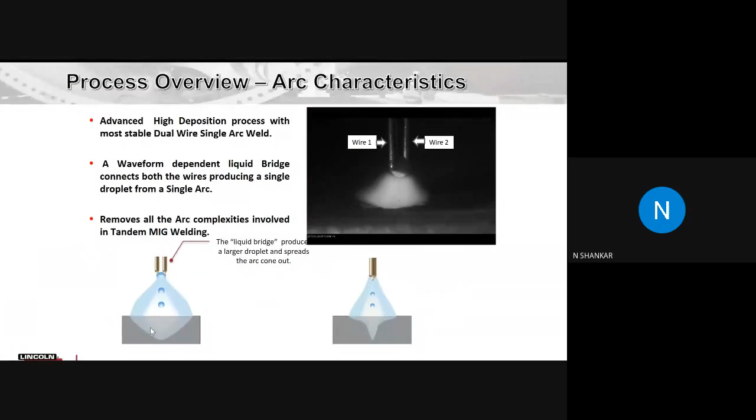How is it different from hybrid or from a conventional MIG wire? There's a small change that has been done. On the drive roll part, there's a small change. Where you're feeding the wire, there's a small change, and the contact tip, there's a small change. Otherwise it's as simple, with no complexities, as a single wire system.

In tandem MIG, you have a lead arc and a trail arc, with different parameters for each, and both have their own task cut out. But in Hyperfill, you don't have those things. You can weld in either direction, and the orientation does not matter. So with all the complexities of tandem removed, it gives you high deposition at par with the tandem hybrid GMAW process.

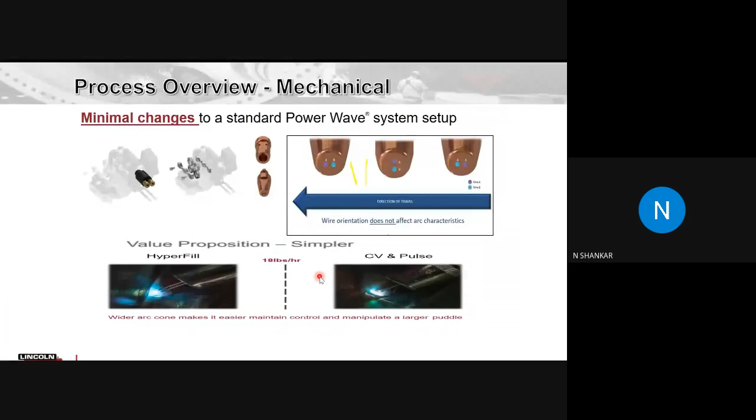Looking at the process capability, it's used for both manual and robotic applications. It can deposit up to 12 kilograms of weld per hour and increase your deposition rate by 100% compared to a single wire process. There's no implementation risk unlike tandem. It's got much lower capital investment, it's easier to maintain, and it has less spatter, which means a clean weld, and you can do an 8mm fillet in one single pass.

When you look at the automation capability, it is compatible with all robots that you get in the market. You can do it with two 1mm wires or two 1.2mm wires. Torches are available for all models, and seam tracking and touch sensing are available to support this process.

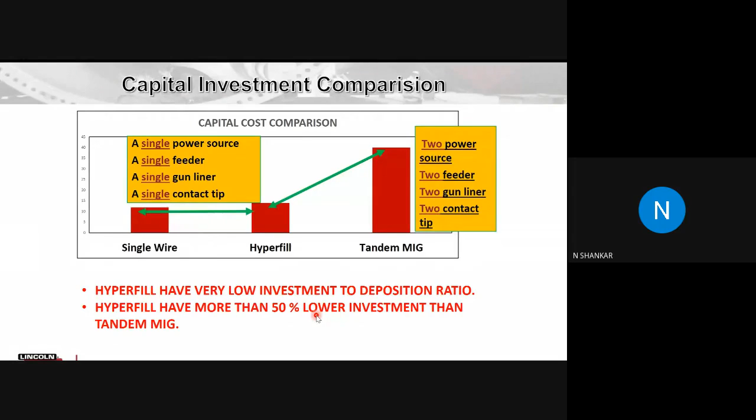Looking at the capital investment, it costs almost as much as a single wire system, but gives you deposition at par with the tandem MIG process, meaning it's 50% lower than tandem MIG in investment while being at par in productivity. That is the Hyperfill process for you, an all-round process giving good quality, high speed, high deposition, and taking care of quality parameters like penetration with no spatters.

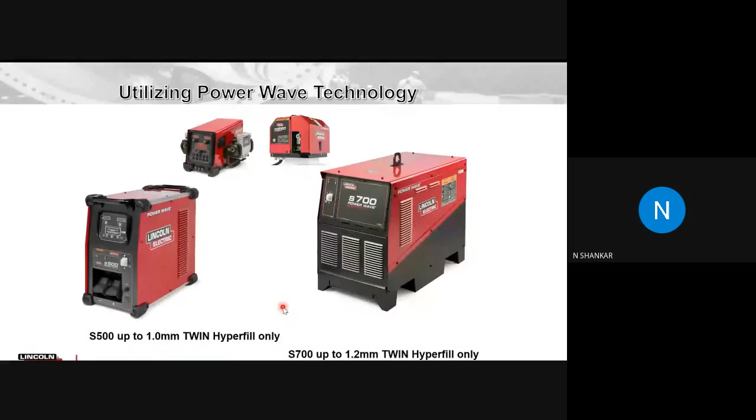Lincoln's Power Wave technology is used for implementing this Hyperfill hybrid process.

Some examples: here's the hybrid process used for mining buckets. Earlier it was done with 9 passes using a 1.2mm metal-cored wire. By implementing the hybrid process, they were able to do it in 5 passes, so they reduced 4 passes, and the welding time came down from 1,000 hours to 600 hours for this huge mining bucket - a 40% reduction, or 400 hours saved.

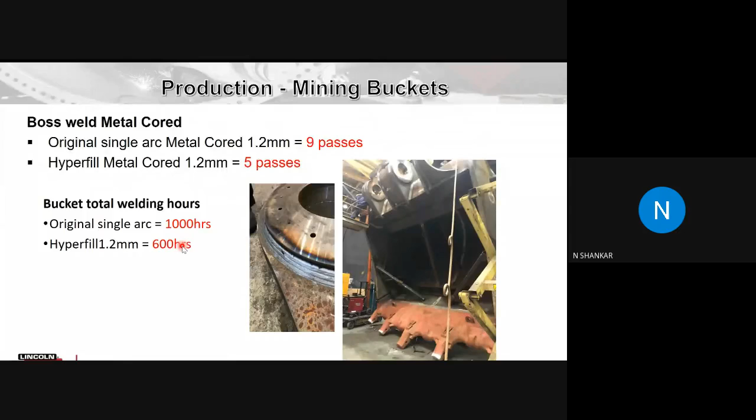Here's another photograph of the same mining bucket. It was also used in hydraulic ramps, reducing welding time from 30 minutes to close to 18 minutes. We have done it in India also for a customer; we are developing it further.

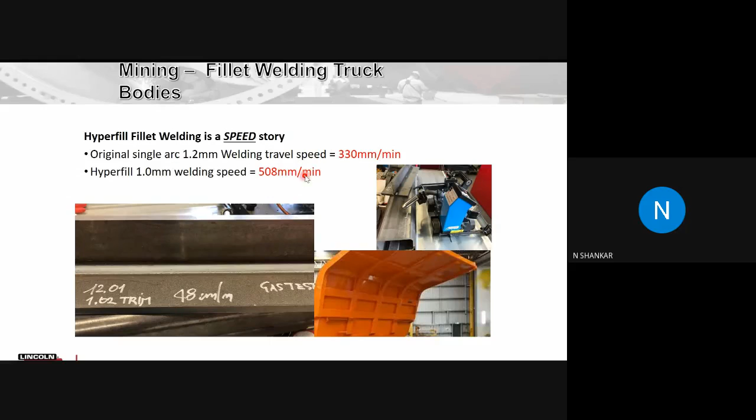It has been used in mining trucks, not just the buckets but also the truck bodies, with a semi-automated linear welding track and a trolley. Hyperfill allowed the customer to move from 0.33 meters per minute speed to 0.5 meters per minute. You're looking at depositing 8mm, 12mm fillets. It's not small welds, it's huge welds they're talking about.

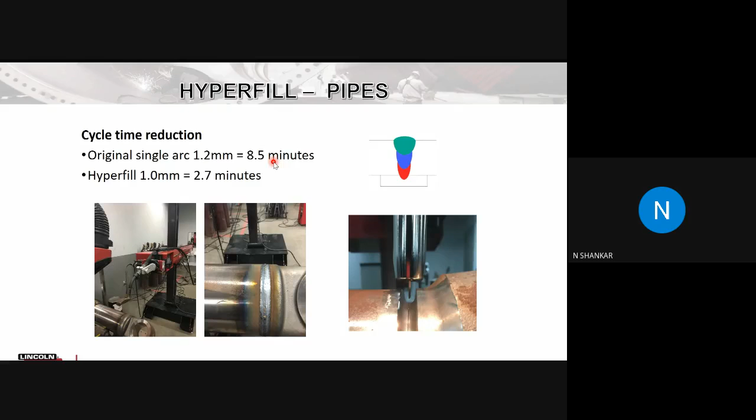You know what it means when I say I'm reducing 400 hours of arcing time? Just for your understanding, a conventional MIG welding machine will draw close to 20 kilowatts of power, which means you need to spend 140 rupees for every hour you're welding. If you're reducing 400 hours, look at the cost you're going to reduce on the manufacturing cost. This is good for industry people. I'm just explaining to you the effect of reducing the arcing time.

It's been used in steel bridging applications also in a big way. So that finished my presentation. I just wanted to touch upon hybrid laser welding, hybrid strip cladding, and also hybrid MIG welding applications.